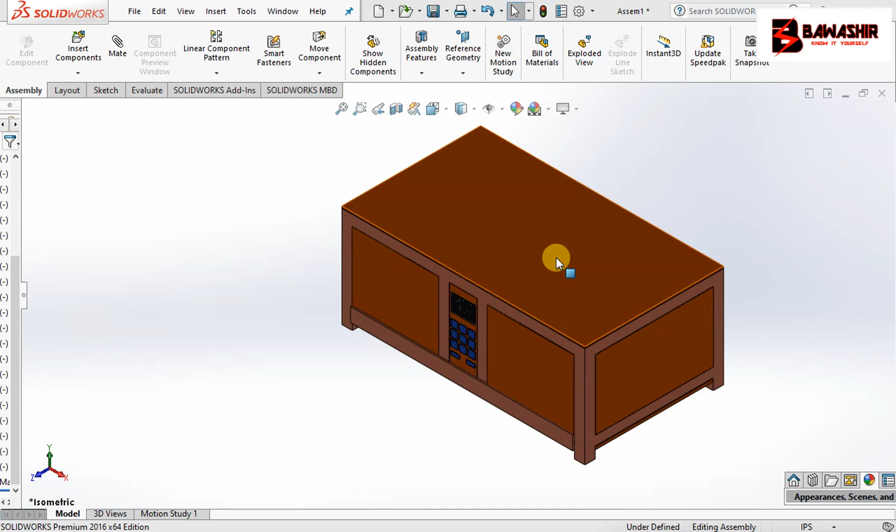Today our electricity has entered the furniture. Here it is in SolidWorks, software used called SolidWorks. I've tried to come up with a simple innovation of a home center table. This component here, you can design it as a home center table for your sitting room, more so if you use glass. If you put a glass top here, it can look nice and also reduce the height a bit. Or it can be your TV stand, your wardrobe, your safe, anything you feel like.

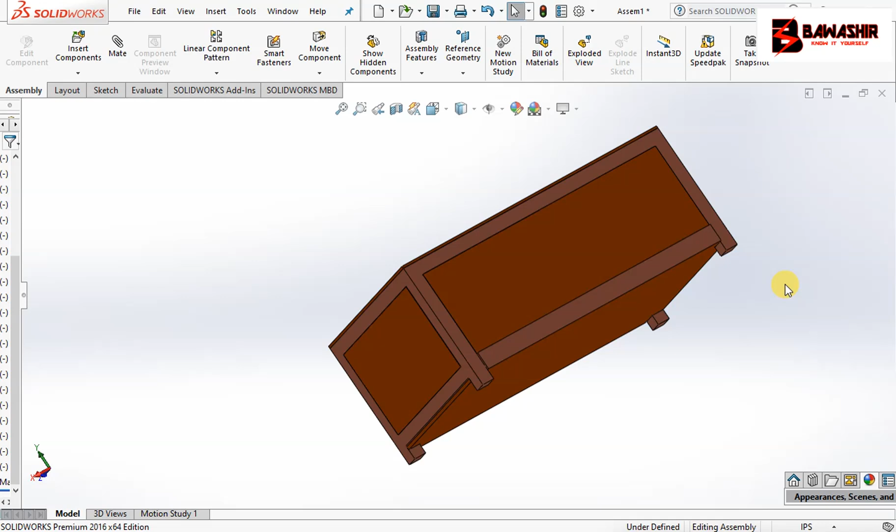So we are going to try to see how we have assembled this one part by part, but I'm not going to be so much detailed. I'm just going to dismantle this one so that you can see how each part has been brought up to come up with this nice table. When I try to rotate this table here, that is the behind. Hope you can see, that is our table.

So what is this screen you're seeing? This is a screen, these are buttons for typing. Now this table, as I've told you, it is electrical. It operates with electricity.

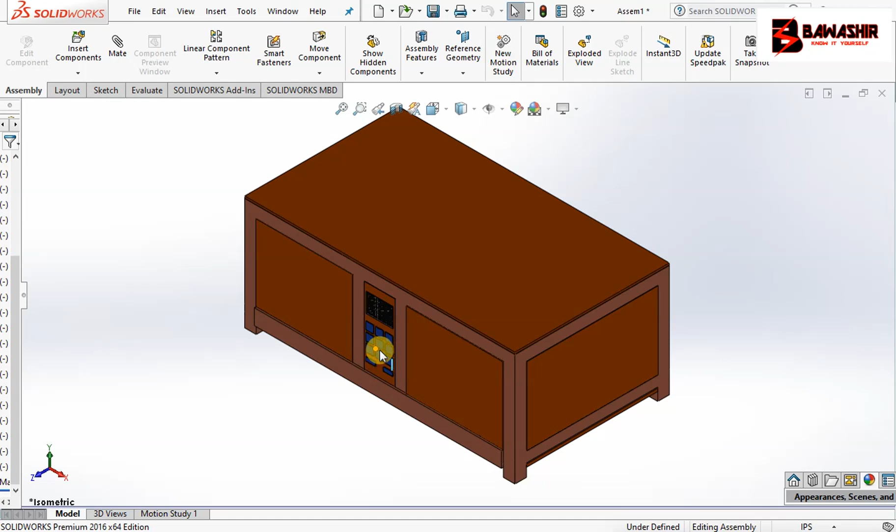How? Now these typing buttons here, you have to input the password, and there are two passwords. One password opens one door, the other password opens the other door. So it depends on which door you want to open, it is the password you put in. If you put in a wrong password, it's going to make an alarm after a given number of attempts.

Also this table, if it is placed somewhere on the floor and someone tries to lift it up, it is also going to make an alarm. Or for direct opening, it's going to make an alarm and also gives you a phone notification.

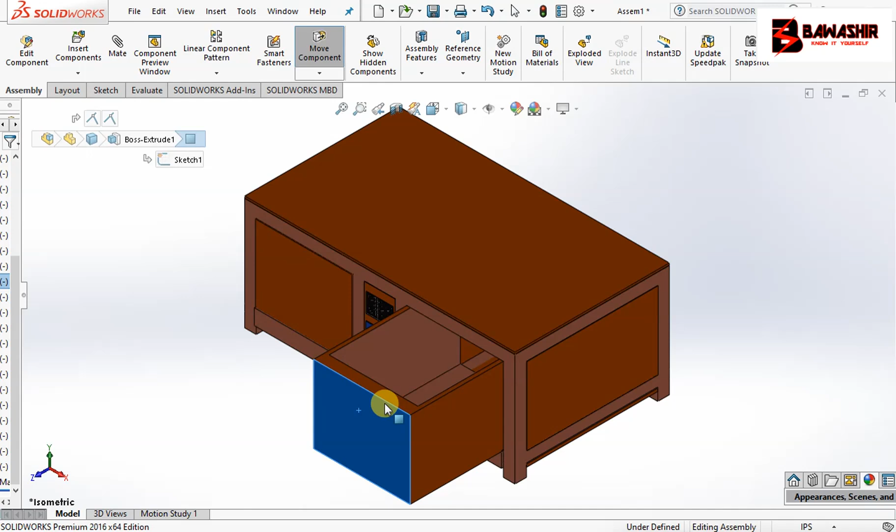Now here, this is how the doors open. You see, this is one door and this is another door, that is how they open. But they do it electrically. Only here I'm giving a view in the software on how they open. So I'm going to tell you the mechanism inside that makes these doors open electrically.

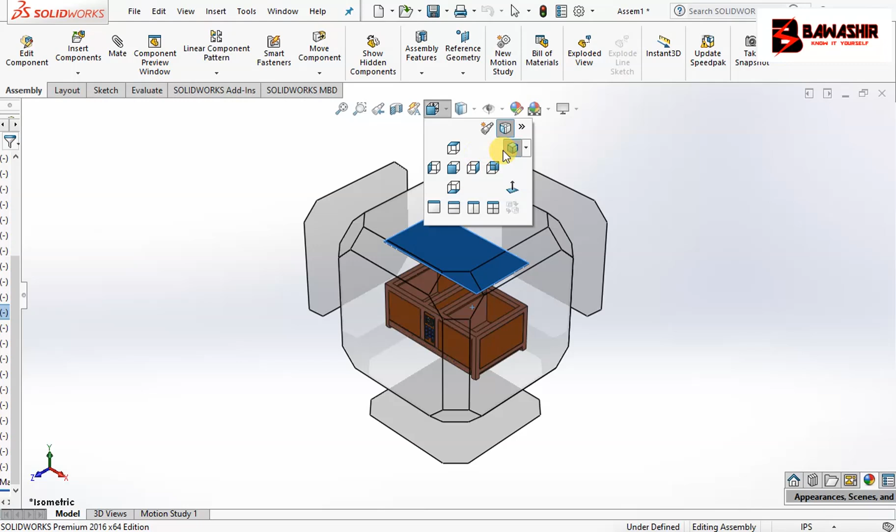Are we there? Now, when we try dismantling our table, the first part we have is this one, the top. Hope you're seeing it going off. So this is the top, part one. So you can see we have remained with our table open.

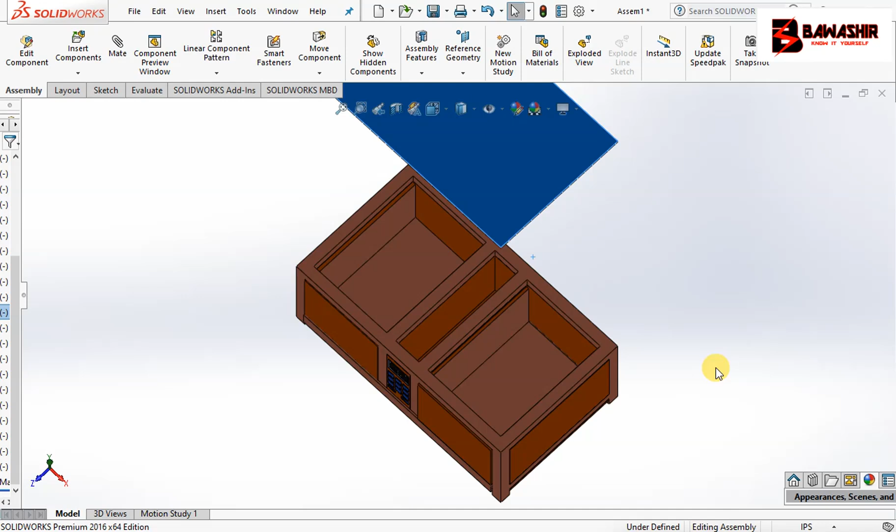When we check inside, hope you can see. Now after that one, we can remove the sides. I have this side, then I also have this side. There's this side this way.

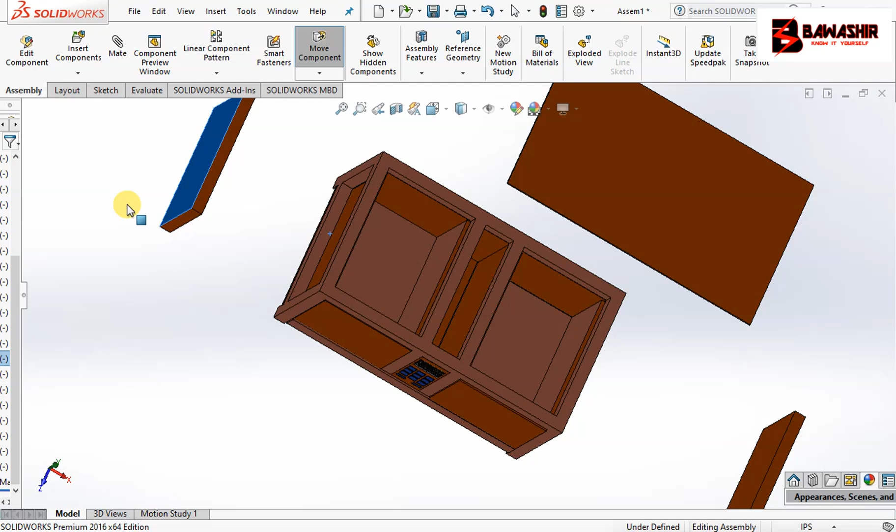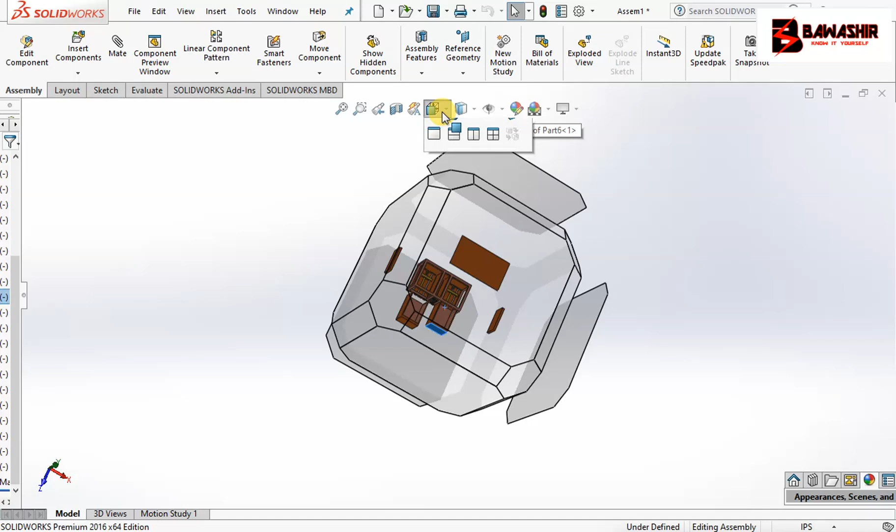Are you seeing? So that means if the docks are removed, these are the docks. And this is another dock. We are now dismantling our table one by one. So as I've been telling you, this is one dock, this is another dock, this was the side cover, and this is the side cover.

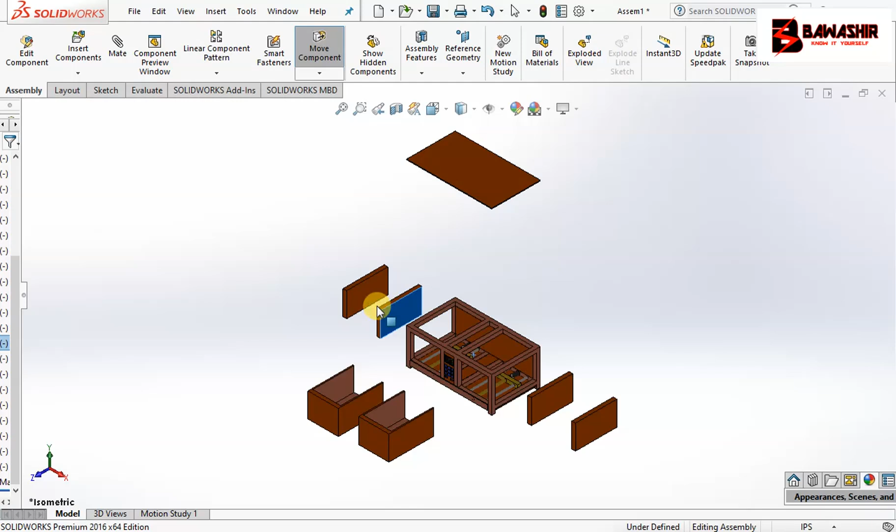We also have another cover inside here. There is also another cover inside here. Are we there? And now there is also this front cover.

Are we seeing? So these covers, the top, you can make it glass, more so if you're going to make it a center table. These ones, the rest, you can make them metallic, you can make them wood, or you can also make them glass if you want it to look more neat.

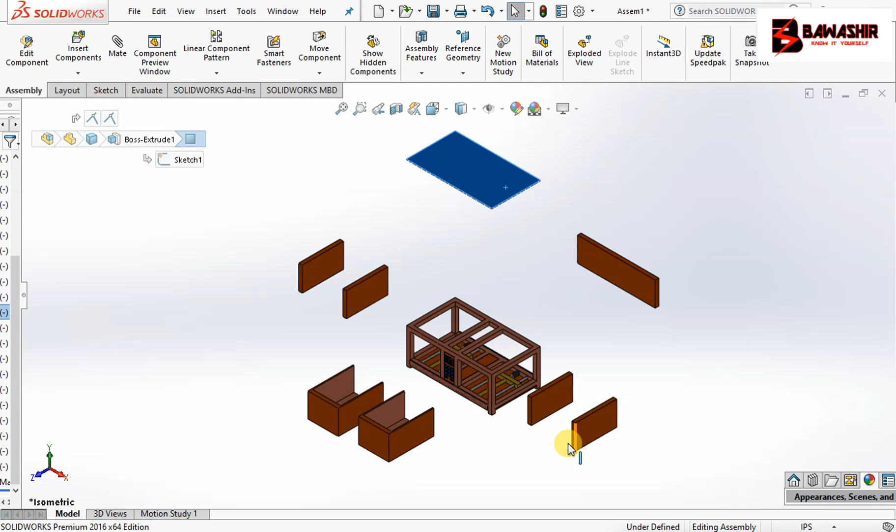Are we there? Now our table, here we go. So it is remaining more of a frame. Now when I also undock this, our electrical controller, this is a panel, a controller. It is there. Are we there? We are almost remaining with only a frame.

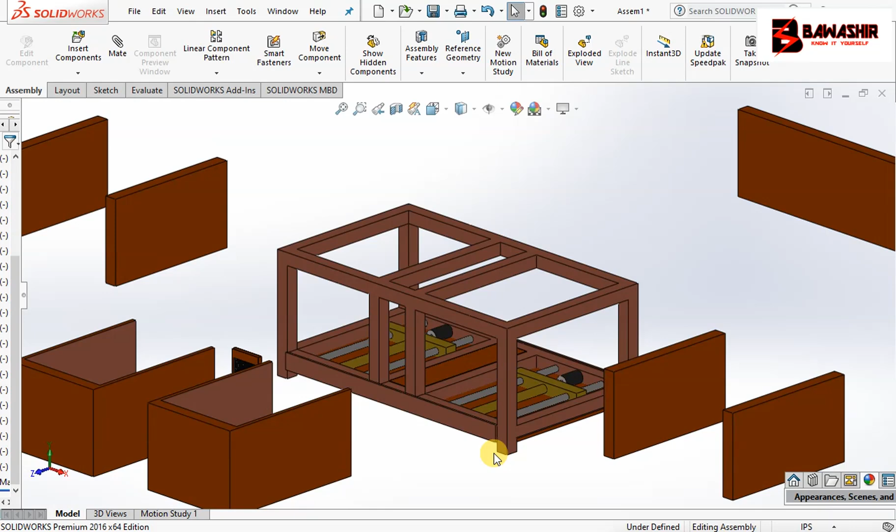So when I rotate down this table, we also have another frame, the cover, which is down here. Are you seeing? It is this one. That is also another cover. So we are remaining almost more of a frame.

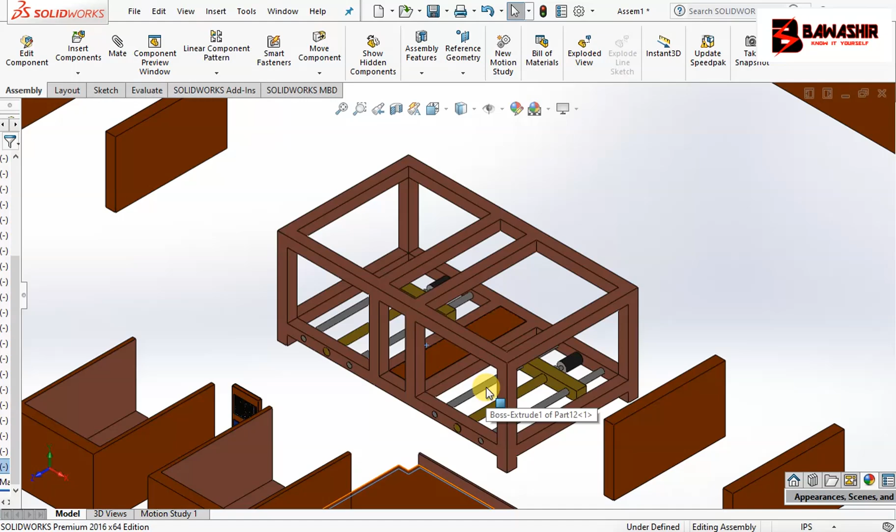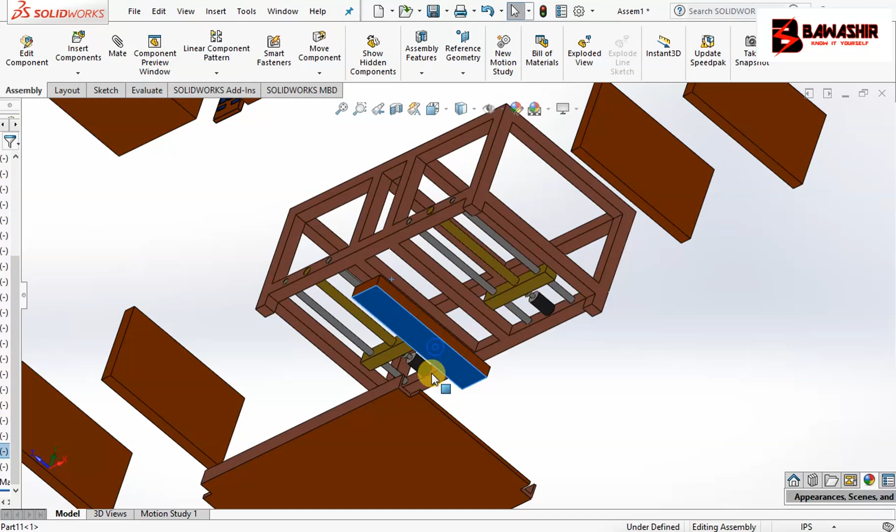Before we remain with a frame, we also have another cover. Apart from that one, we have another smaller cover here, which is this one. We also undock it, remove it. Are we there? So we are remaining more of a frame just.

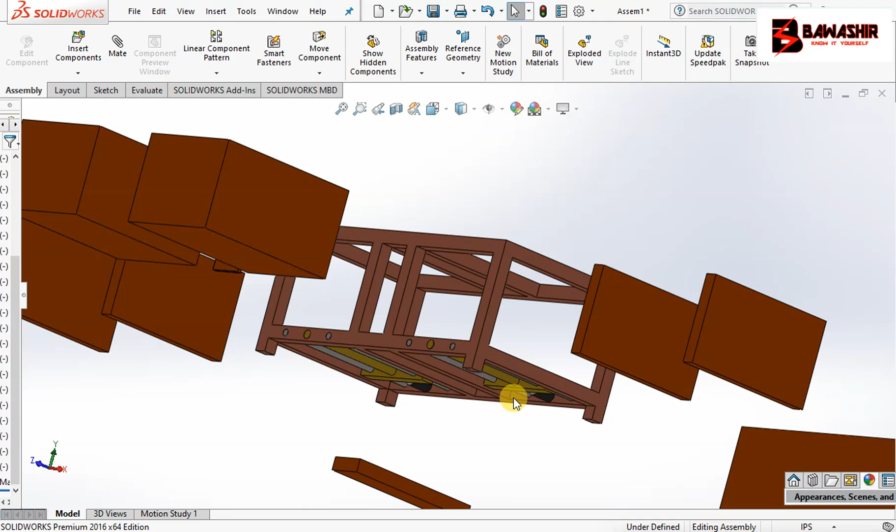Now, I want to let you know the mechanism how this table opens electrically, and it is our main concern. So when it is the electrical system I've not put in, but the position for electrical system is this smaller portion here. This smaller corridor is where we put our electrical system.

Now, one of the electrical components that we have here, we have these two motors. This one here is a motor, this black thing here is a motor. It is coupled on this rod, and this one is a screw. You know what happens to a screw and a nut? A screw with a tapped hole on it, and these ones are guide pins, these are guide rods.

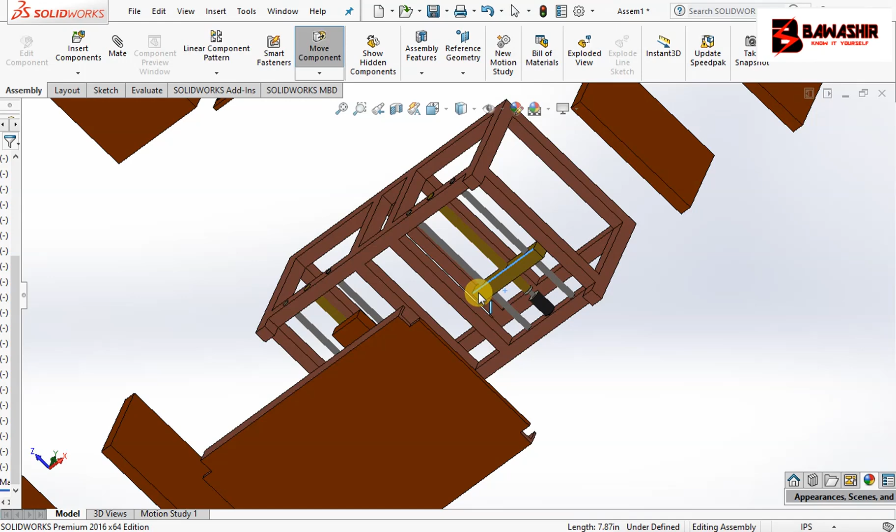So when this motor rotates, this particle here moves according to the direction of rotation. It moves forward, when it changes direction, it moves backwards. Forward, backwards, are we there? The same happens to this dock. When this motor rotates, this one moves forward or reverse.

Forward or reverse. So since this is a screw, our table has no handles, our table has no locks, because you cannot pull this screw when this motor is not rotating. That is the locking mechanism we already have, so no need to again put the lock. These rods, this part here, you can see it is also removed, it can be made on its own. There is also this one, and these rods also you can remove and just fix them. Are we there?

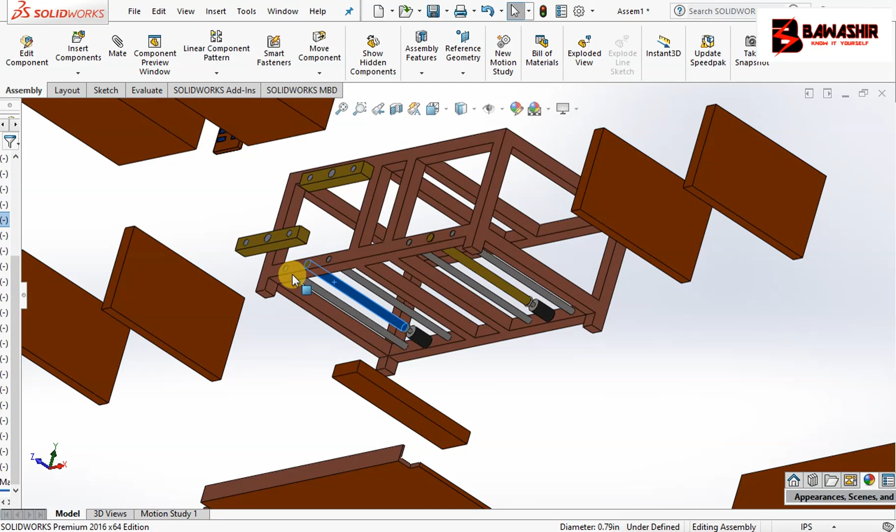So these are removable materials. They can just be removed and fixed back. With our screw also can just be removed and fixed back. With our motors also, so we remain more of a frame.

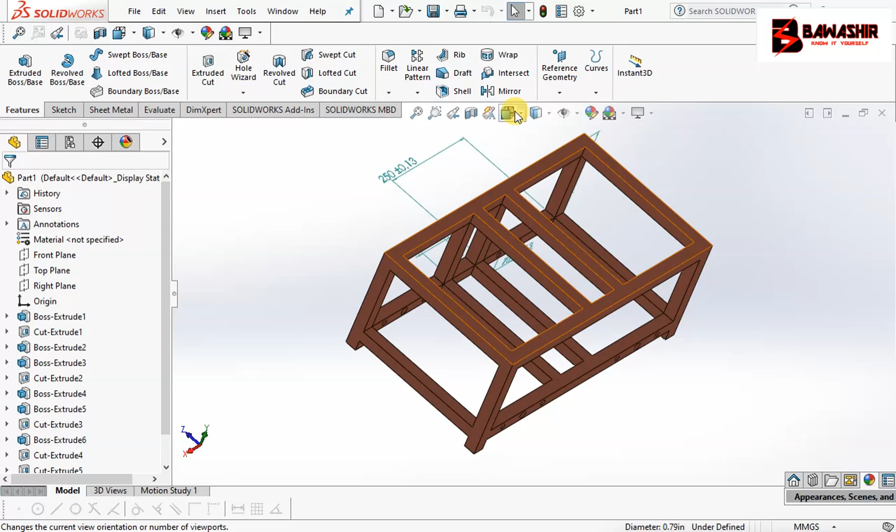Let me give you a good preview of the frame here, actually these are the parts. Let's see the frame alone. This is how it looks. Don't mind the dimensions, these are mine, but you can just copy the format and come up with your own dimensions according to the size of the object you want, and make your thing.

I know only what I have not elaborated properly is the electrical system that I'm going to put here, and that is for me. This is just to help in a structure setup, how to come up with the structure. And this frame, it would be best if you make it metallic, more so if you would want it to act as your safe. I think it is best if you would make it metallic.

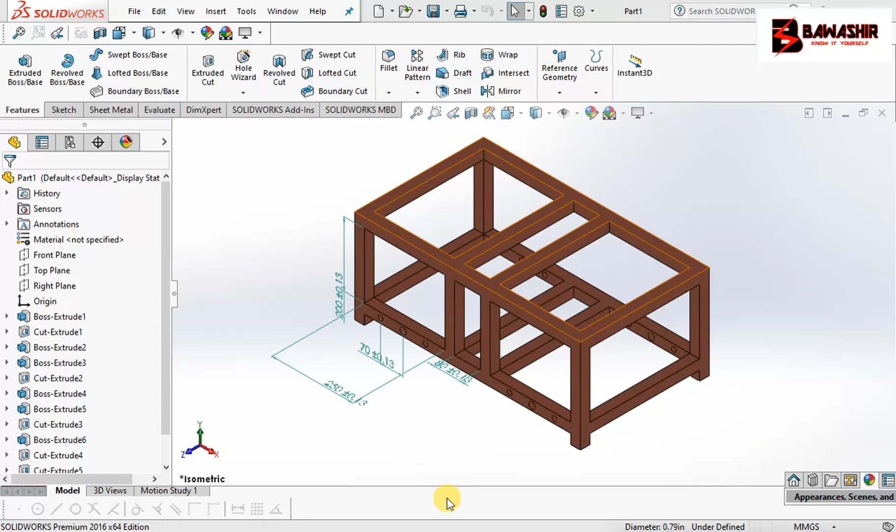Now when we go back to our assembly, are we seeing? So we can take back, now these ones, since they are the ones which move, when we put these docks, the base of this dock is joined on these movable parts. The base of this dock is also joined. Either when they are metals, it can be joined by welding or by nuts or by glue, or according to how you do your assembling, provided you have joined them together. So as these ones move, the dock also will move.

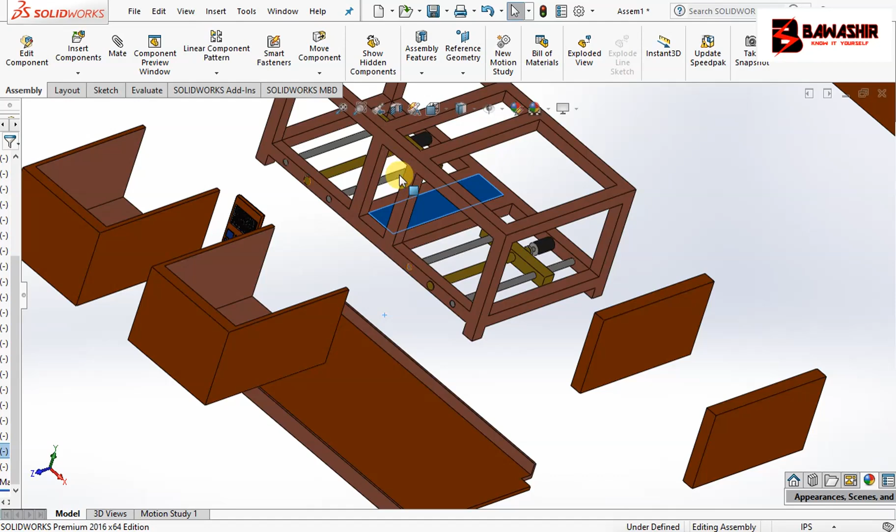So we put back, we assemble our parts slowly. That one covers there. Hope you are seeing how our table is coming up to be nice. Then we can put back this cover in the middle here, this corridor.

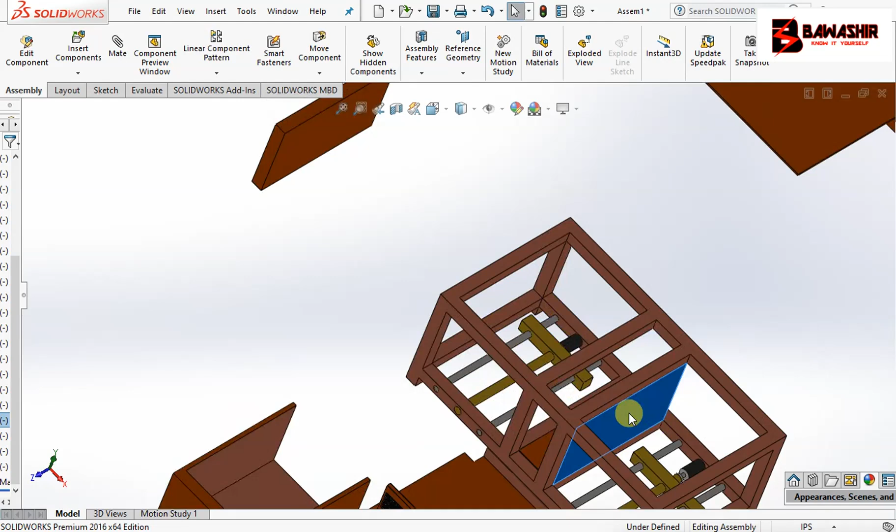Are we there? Remember, I told you the cover you can make any material. We had some other covers. We have this one. It also covers here, making this corridor.

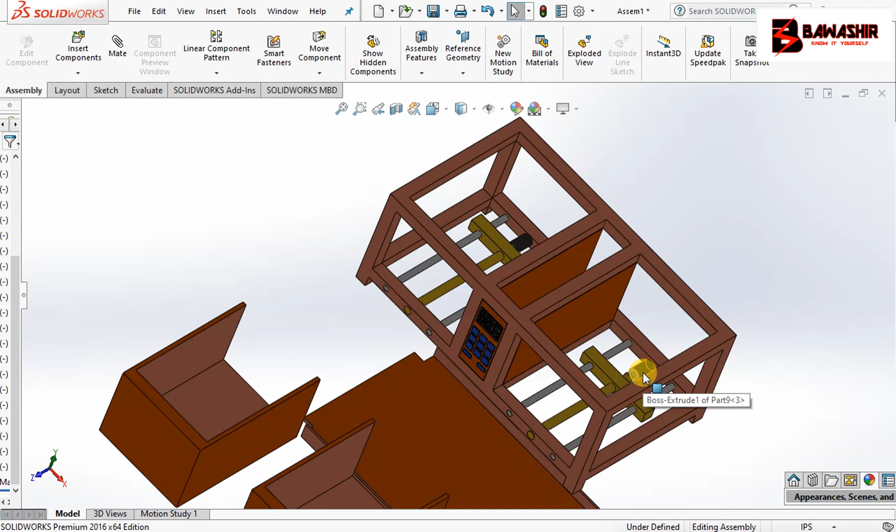Now, as I told you, that corridor's main purpose is for me to put my electrical components. Since I'm also having my electrical panel here, I take it back. That is my control panel, my display, my user interface with the electrical components here connected to my motors. No need of any locking mechanism, so from there, the screw itself can act as a locking mechanism, and it is a very nice one. You cannot pull it. So I bring this part, I also cover it back here.

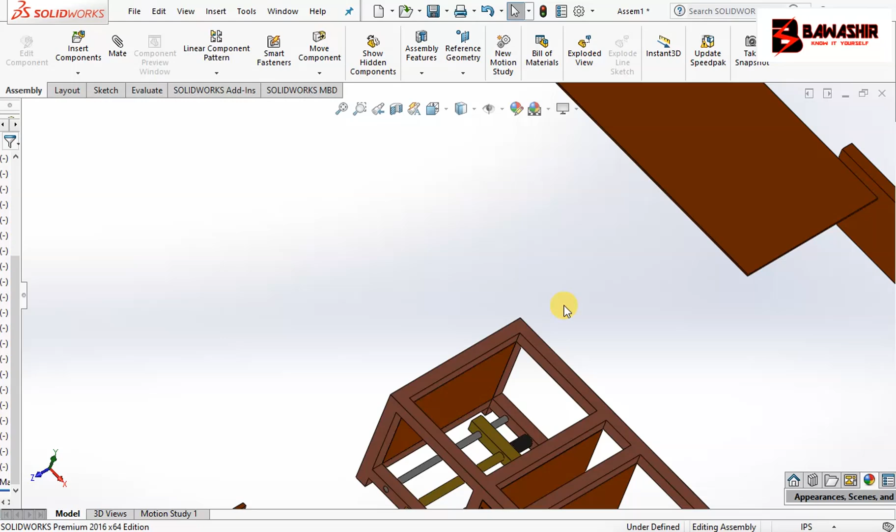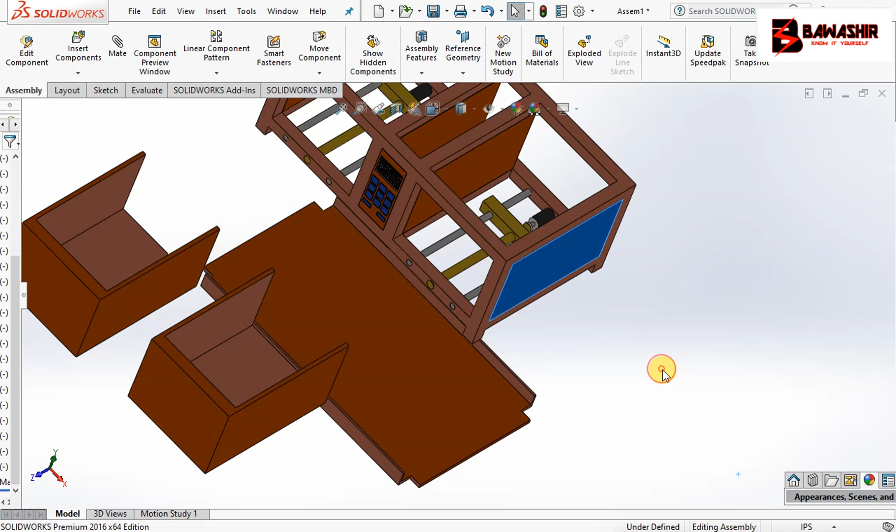Then we can also put back this one. I think our table is coming up.

Now what we do is we get our lockers and we join them. But now here you must be good in fabrication or in doing these things, because you must join the locker to the movable pin that you saw. Then after you place it, before you can insert the rods and the screw, because when you have already inserted the rods and the screw, there is no way you will put them. Hope that one has been understood.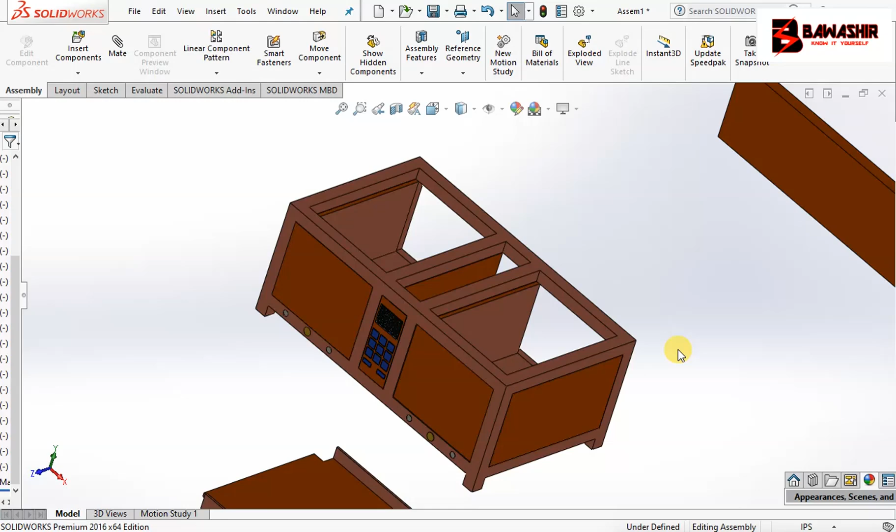So you are going to fix it too, but since this one is software, it makes things easy, and you think when you are doing the real thing it's going to be easy the way I'm doing. So from there, we are now going to get our behind cover. Is it behind or front, whatsoever? Then we also fix it there.

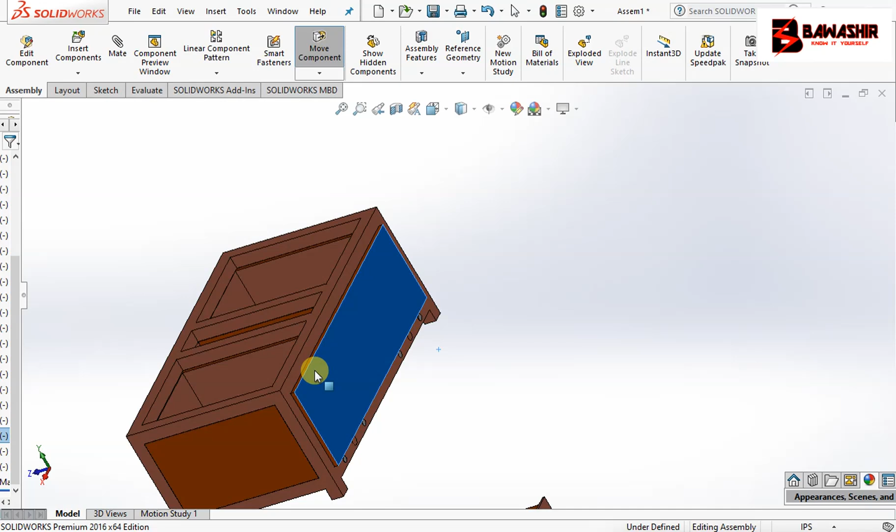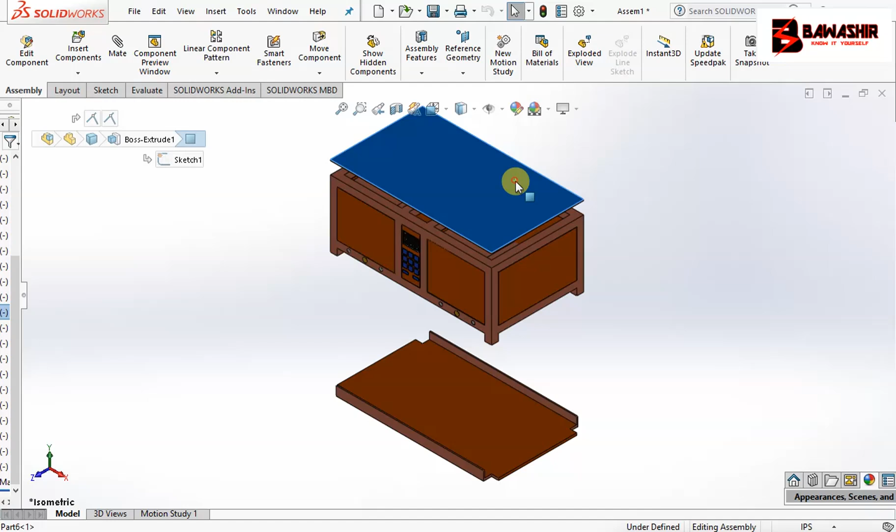That is it. Let's have a nice view. Now we are remaining with the top. We bring it. We also put it here. Now the top, you can, if you want a center table, you can make it glass.

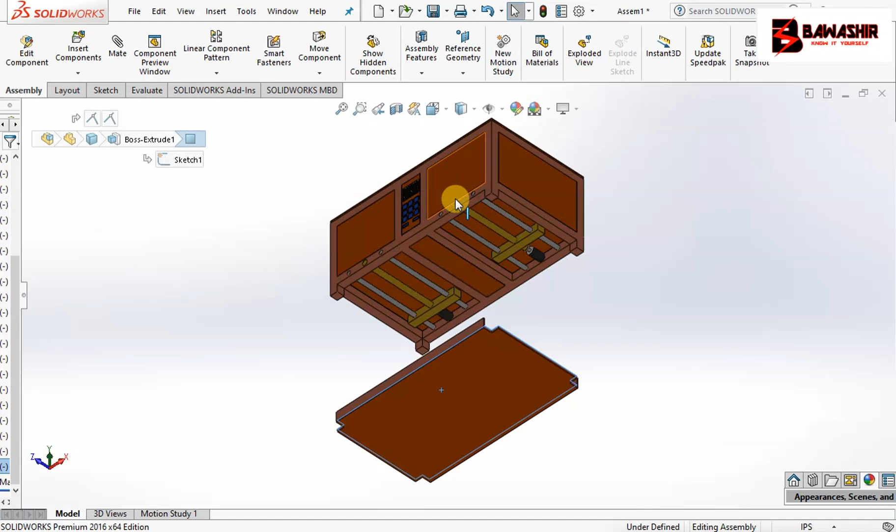And it would be nice if you make a darker tinted glass. It would be nice. Now why did I put this base, this cover? You sit down, my electrical components, my motors will just be exposed. There are also these screws here, they are outside, just exposed. They don't make the thing look nice.

Even behind this way, there are the screws and the guide rods are just exposed. They don't make the thing look nice. That's why I designed this kind of cover. Let me show you the way it is designed.

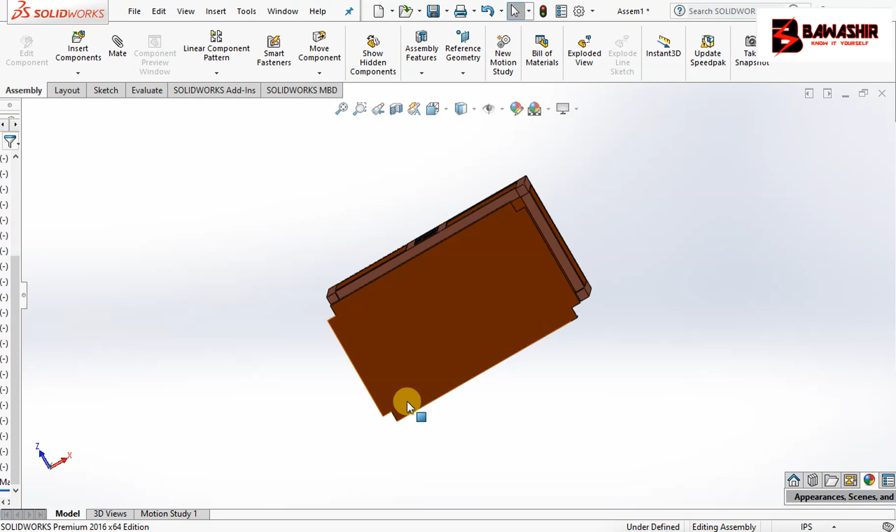I think it has here these pathways to allow the bases, the foots of our table to go through. So when I take it, you just see the way it enters, and it covers our table, and there our table comes up to be something nice.

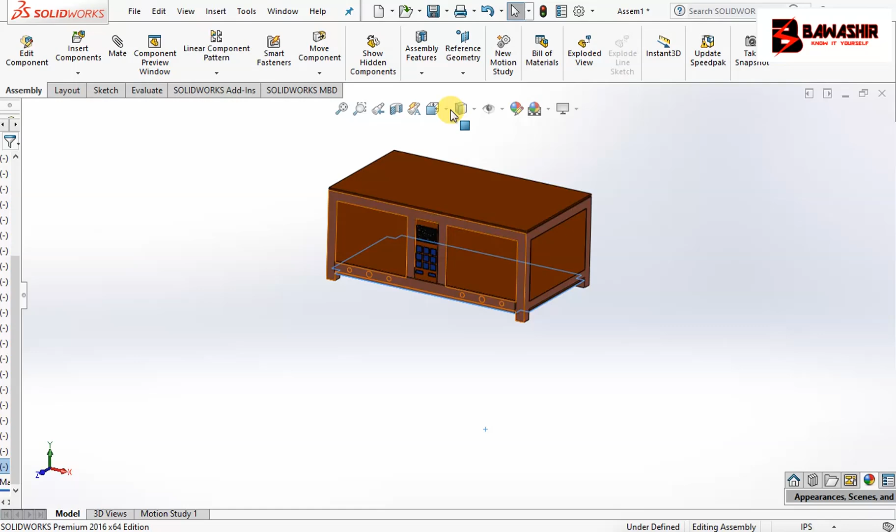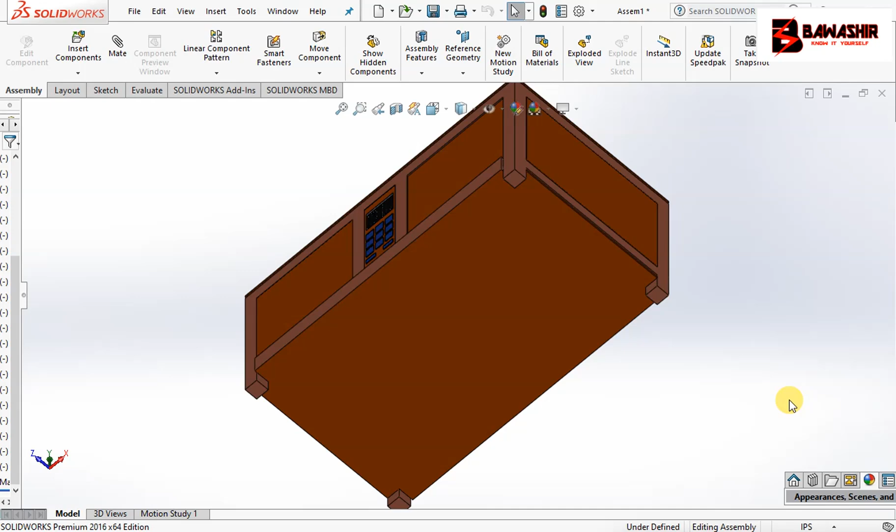I say don't mind the dimensions and don't ask me the dimensions. You can use your own dimensions according to the size of the object you want. Are we seeing? That is our table, electrically operated. Only that I've just given some mechanical view. The electrical view or the electrical know-how, it is again some other story how to do.

Actually, to give you a hint, you just use a microcontroller and you'll keep yourself moving. Thanks for watching.